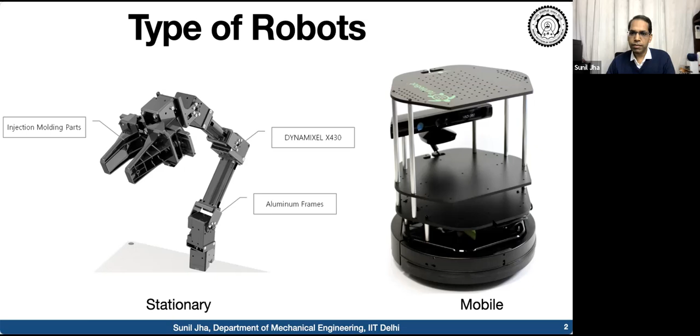As I was explaining in an earlier session, there are different types of robots that we all understand. There are grippers, basically articulated robots with multiple degrees of freedom - it's a kind of arm that you will be creating. There's also mobile platforms, like the base mostly seen in vacuum cleaning robots, and this is one of the turtle bots being used to learn ROS.

This is the one I was talking about, given in 2019 to create a legged robot - the Robocon challenge is around this robot. This is one robot design you can see which has similarity with legged robots, and there's a lot of popularity of legged robots around. So whenever it comes in Robocon, we can look forward to creating a good design for that. Otherwise, those who have interest can find a lot of resources.

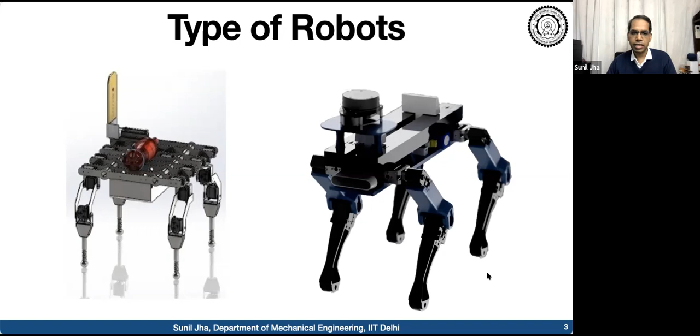When we were talking about the Robocon robot, in all the years of participation you find there is a base, and a lot of mechanisms added on top of that. So you will be coming out with designs of different mechanisms. The concept of those mechanisms can be thought through by brainstorming between team members on how they will attack the problem for that game. So we'll start with the base design, and slowly discuss some mechanisms useful for participation in Robocon.

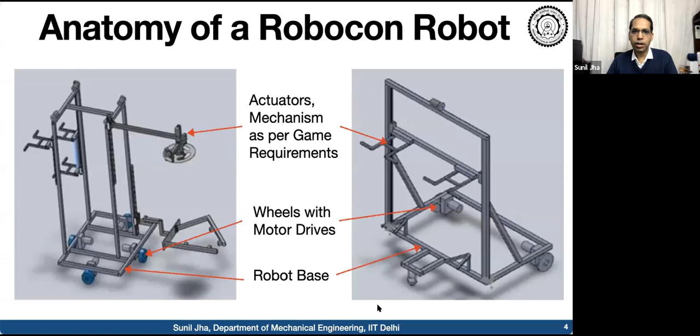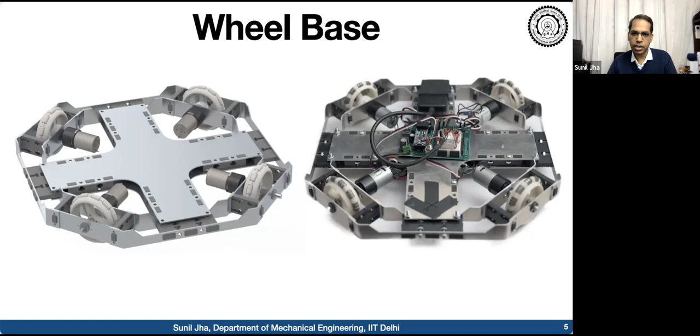Different wheel-based designs are there - we've captured some wheel-based designs here. This one has 4 wheels placed around the platform. The most important part is maneuverability in multiple directions - how quickly you will be able to move, take a turn, and reach a particular place in the game field. That's the basic idea.

This is another design of the wheelbase - you can have differential drives with one omni wheel caster, or use another type of caster, a rolling wheel. This is another design with 2 casters on front and back, and 2 differential drives. So there are various wheel bases being used. We'll start with one base design, but based on your interest, you can design and analyze other types of robotic platforms as well.

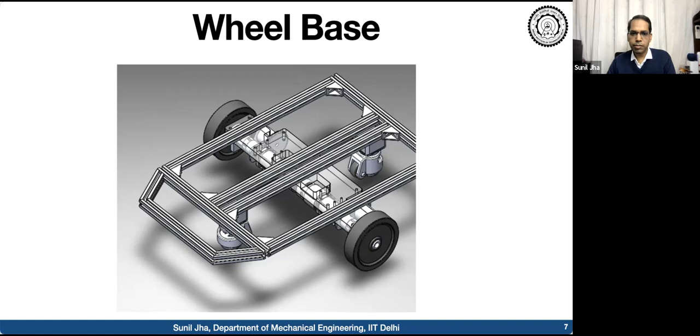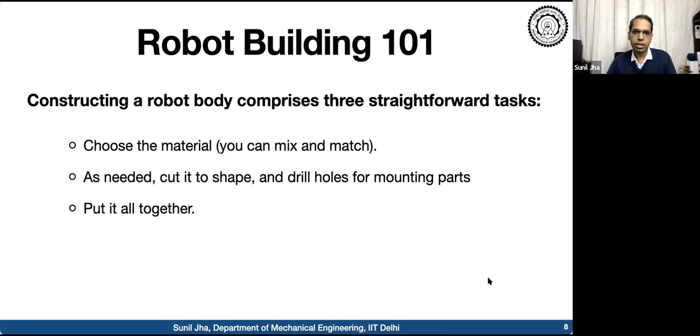As I was explaining, we need to understand 3 tasks while creating the robot. First, the material we need and should have to create the robot. Then, how we will assemble the different components of this material to create this basic platform. And then assembling the electronic circuit on top of that and making it run. That's what we'll be doing in this activity.

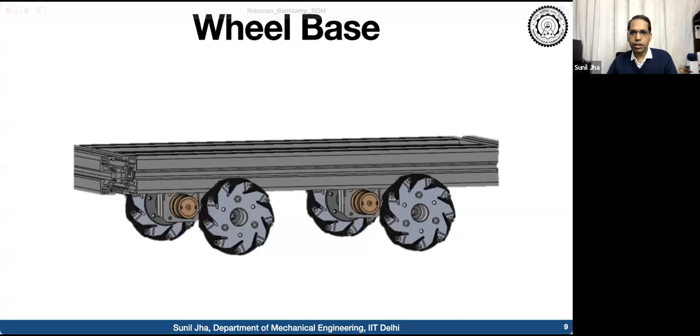This is the basic wheelbase we'll be using for the bootcamp activity - a 4-wheel mecanum design, roughly 500 by 500 millimeters, 0.5 meter by 0.5 meter, since that's a normal size for a Robocon robot. We'll see what materials are required for making this wheel platform, and that's what we'll take you through - a detailed bill of material for the bootcamp and a list of all items required. This list will be made available on the website too, on the FSM skills platform we mentioned.

Let's have a quick understanding and look at this bill of material. I appreciate the efforts done by the team at IIT Delhi to compile this material. We already have one set of material available with us, so we'll be creating the robot as we go along with you. Once you have this list of bill of material, you can have a quick look at it. We'll also provide all the links from where we bought this material - roughly within 6 to 7 days you'll get all the material once you place the order online.

Nothing to worry, even if you are working at your home, it doesn't require much effort. You can easily get this material available to you. There are very minor tools also required to make this robot platform, which I will share towards the end. So it doesn't mean that if you are not at the workshop or institute you can't do this, but this activity can be easily done at home. With minor tools you need to put in a little additional effort, but you can easily create this platform.

The first component you require is the high torque motor. This motor we have selected is 370 RPM with 147 Newton centimeter torque, and one motor costs 2,299 rupees, which is the cost available on the website. I recommend you go with the same components we will be recommending, so it will be easy to use the same design and follow it to create the same robot we are looking at.

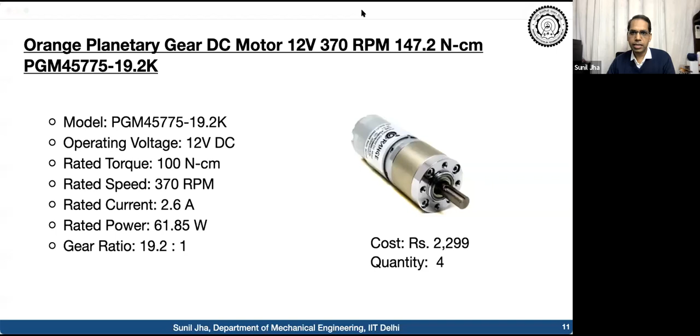We require 4 motors right now in this design, but when we go for a differential drive design, we may require only 2 motors and 2 caster wheels. In this design we will be using 4 motors. This is a bracket for mounting the motors. As we go along we will be doing this assembly ourselves. We'll get the motor separately and put it in the bracket, and this bracket has to be mounted onto the robot wheel base.

Okay, fine, Venkat. So you can take care of the people. I'm not allowing them, so depending on your list, you can just validate and then permit.

We have also mentioned the cost of these materials, so that you will get a fair idea about how much the whole bill of materials costs.

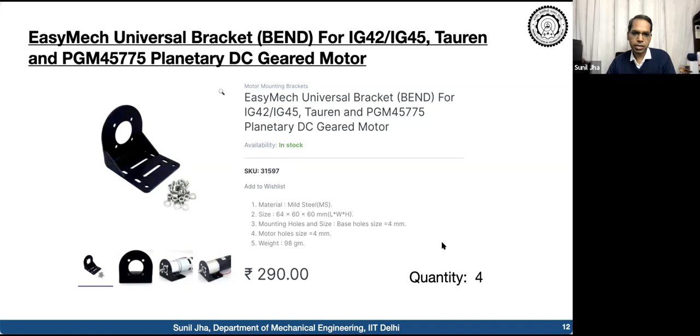This is the encoder we will be using, and the encoder is a very important part of the robot for odometry, because you have to measure how much the wheel rotates, and accordingly find out the displacement of the robot and in which direction it will be turning. So all odometry calculations can be done from this input coming from the wheel encoder. This encoder is required on all 4 motors and can be easily attached, as it has been designed to fix with the motor we have mentioned, so that most of the material we have selected is compatible with each other.

That's the important part. If you go with a different part number or different material, you may find difficulty fixing them together. So our recommendation is that we have already spent time selecting this material, so if you go by the same list, that will be better.

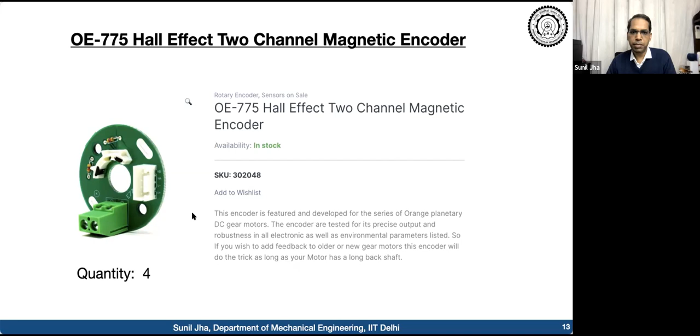Then this is a motor driver. The functionality of each hardware, how they will be put together, how the design will happen, will come later. Today's session is mainly to get you familiar with the kind of material required. After we share the list with you, you will start your procurement process, so that we will be utilizing the next 1 week's time.

At least by the time you have this material, we will take up some design activities as well. So this is a motor driver, and each will be able to drive 2 motors, so we'll require 2 numbers of these over here.

The motor driver is again a very important part of the robot, and it has to be a more rugged and robust driver, because many times I found that due to the large current drawn by the motors, maybe because of some failure in the robot, or the mechanical robot wheel getting stuck somewhere while it keeps drawing large current from the driver, this is the most critical component that gets damaged during robot performance. So that is how it has to be taken care of, and we always recommend to our teams that you keep at least 1 or 2 spares along with you, so you won't face a problem when performing some task with the robot.

This is an important component which takes a digital signal from the controller, whichever controller you use, and it drives the motors, while the algorithm part you will implement on the controller side. So this will be sourcing all the current required by the motors to run at the large torque and speed that you are looking for.

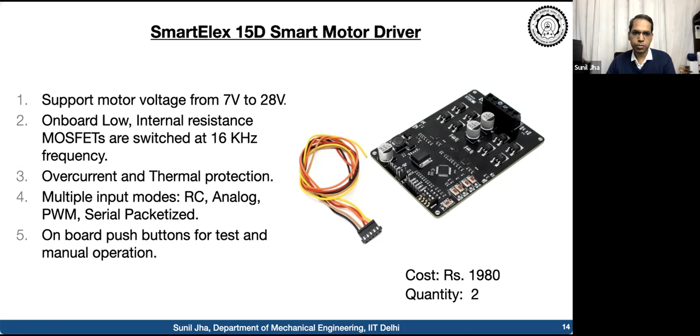Then we will be assembling the wheel part. So this is an element which is to be attached to the shaft, and then the shaft will be connecting with the wheel. So this mounting is for the wheel. You will be coupling the motor with the wheel part.

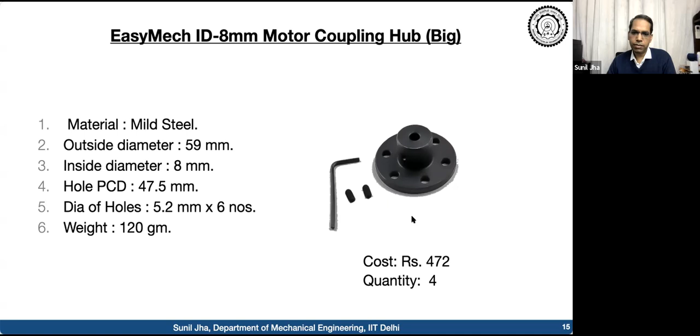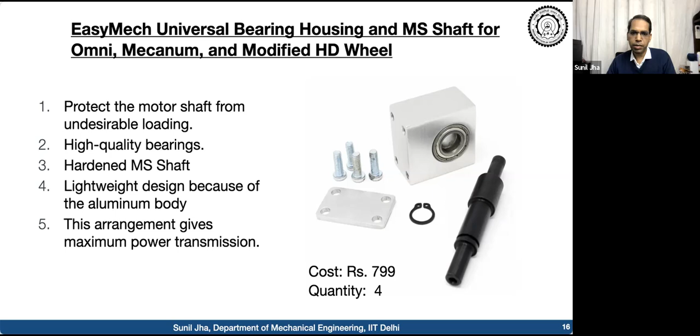This is a bearing house, so you will be supporting the wheel in the bearing, and then connecting with the motor with the coupling. So all these building blocks are required once you create one single axis drive. You will be having a motor, a mechanical shaft that you can see over here, then the bearing housing and the coupling, and then the wheel part you will be connecting. So this is the coupling part.

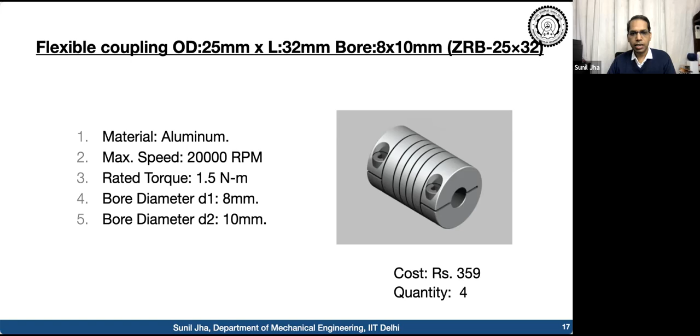The idea is that all load should not be coming onto the motor shaft. So that is how we need to support the wheel shaft properly, and couple it with this flexible coupling to the motor. So we require these 4 couplings for the robot.

Then these are the mecanum wheels that will be used. We will be requiring 2 left-hand side and 2 right-hand side wheels. So this is the right side wheels, and we require 2 left side wheels basically. So these are the 4 mecanum wheels required for making this robot.

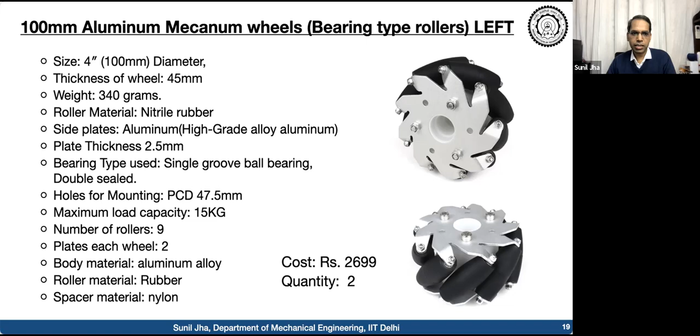Then comes the controller. So once you have a wheel, once you have a motor, you will also be having a driver. So at least this electromechanical hardware can be fitted to your base, and after that your driver should be communicating with the controller board.

So the brain of your robot, as we were discussing earlier, all sensor interfacing and all motion control interfacing will be happening with the controller board, because here we will be writing all the programs to actuate the different mechanisms of the robot based on the sensing that you will be getting.

So in this case, we have options to select which platform to use. I'll just show you 3 different platforms, 3 different controllers, depending on the kind of task you will be performing. As we go along for various themes in Robocon, you are mostly moving toward vision processing as well, so we need to put more advanced sensors onto the robot.

Many times people use LiDAR as a sensor, ultrasonic sensors will be there, and then optical sensors basically for line following. You'll also be having a camera that can be used in the robots. So the sensing world is now growing, and the controller capacity required to process that data is also required, which is a little higher. So we can give you exposure and understanding of different controllers and their capabilities.

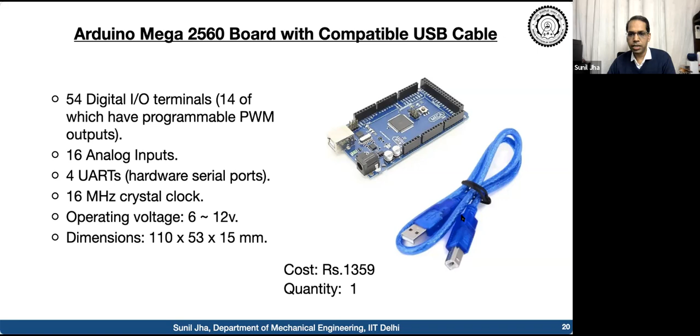But today we just need to identify which hardware you will be preferring. And then it has serial communication interfaces. So this is one board that is possible that you can use on your platform.

The other board that you can use here is the ESP WROOM 32 Wi-Fi. The good part is that this is again a good controller, a 32-bit controller, and you will be having a wireless capability into that.

So whenever we are going for manually operated robots, earlier people were connecting them with wires and designing a pendant to control the robot part. But these days we will be using PS4 handheld controllers through which we can communicate wirelessly. So if you are requiring a wireless communication interface, this controller has Wi-Fi as well as Bluetooth onto that. So this controller we can connect with Bluetooth, and PS4 can communicate to it, and you will be able to control the robot wirelessly in the field.

So any manually controlled robot can be wirelessly controlled. In that case, you need to have some Bluetooth communication available on your controller. The previous board that I shared with you was not having Bluetooth, so we need to add an additional shield onto that to add Bluetooth capability in the Arduino. But this controller comes inbuilt with that Bluetooth capability. So this is another possibility.

It has a very good flash memory also, so you can have large programs running into this. So this is another option of the controller.

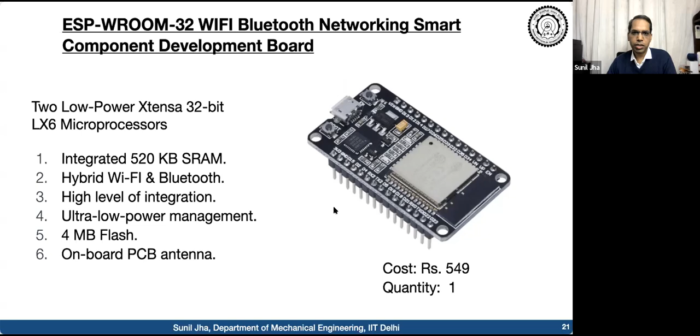The third processor we will be discussing is the Raspberry Pi. Those who are familiar with it, the current version is Raspberry Pi 4, which comes in 2 GB, 4 GB, and 8 GB RAM capabilities.

This is the board which actually runs an OS. The previous boards were not running operating systems, so certain applications and functionality can only be done with an operating system. This is a kind of mini onboard computer for you. You can run Ubuntu into it, you can run Raspbian into it, so multiple operating systems can be made to run.

Once you run Ubuntu onto it, you will be able to run an operating system like ROS for controlling a robot, and the complete functionality can be done in ROS on this. The earlier two boards were not supporting ROS implementation because it requires an operating system to work on. So this is the high-end processor that you can use with your robot platform.

The good part with ROS is that you can create multiple nodes and distributed processing. Sometimes we may be processing the vision part and then the LiDAR sensor, or maybe additional sensor IOs, that will be more difficult to manage with the previously discussed boards.

But this kind of board with an operating system like Ubuntu running on it, and with the drivers available from ROS, you will be able to process all those signals simultaneously. We can also design the whole control system where multiple boards are working together, so that's a way distributed computing can also be implemented once we go with ROS.

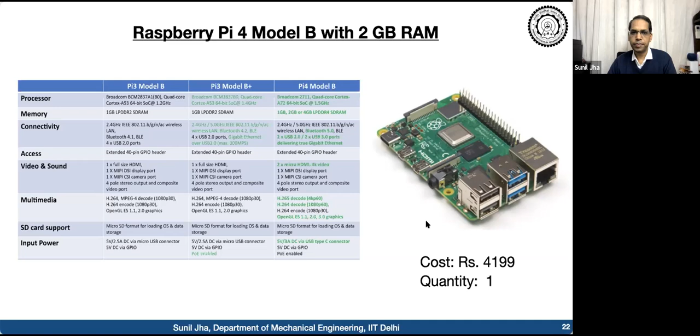This is just a memory card for this Raspberry Pi only. The previous two controllers, Arduino and ESP32, may not require this card because they have onboard memory that is used for that purpose. They have limited memory capabilities, but that is good for embedded computing, and you will be writing the program directly onto their flash memory. You need not put any additional expansion card like this. So this is only required if you are using a Jetson or a Raspberry Pi.

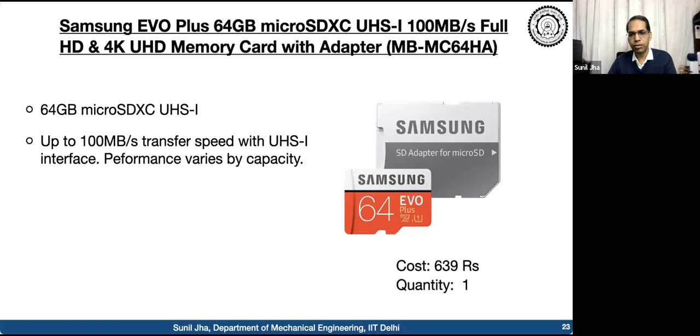Then the most important part is the battery, because your robot is supposed to perform multiple tasks. We need to assess the total power consumption required for the robot, and most importantly, it's supposed to run the whole task for a 3 minute game. We also look forward to doing some trials, so the total AH required for this battery is very important. This is a 12,000 milliAh battery, that is a 12 AH battery.

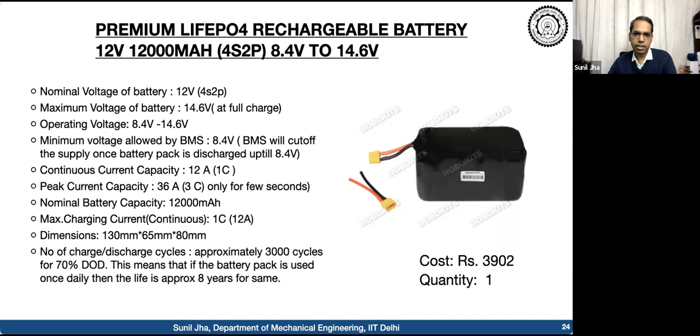We will be using this to power all the motors, the controller part, and certainly the sensors. So everything requires power, and we have to estimate the total power consumption, with the highest power being consumed by the motors only. That is how we need to see the large current being drawn by the motors, so we need to find out the size of the battery. Sizing of the battery is a very important part, and this is the one we have selected for the robot we will be creating.

Then you need to charge this battery because it is a rechargeable battery. So you can have a battery charger that will help you in charging the battery multiple times as you go along and test your platform.

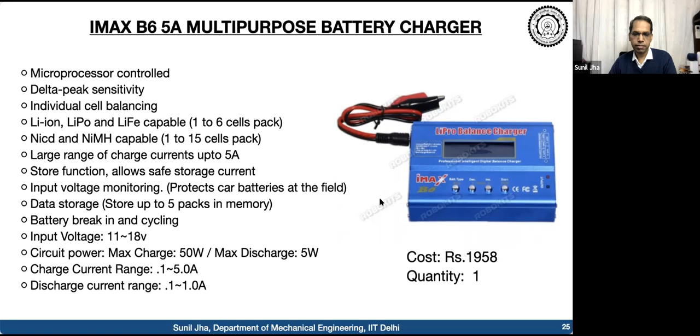For manual control, before this wireless controller, people were using wired controllers, but these wires can't be taken so long in the field, and they sometimes entangle with stuff on the game field. So this is the handy part that you can use to wirelessly move your platform manually.

So there are two modes: one is the manual control part and another is the autonomous part. It depends on which tasks we would like to perform manually and which functionality we would like to implement autonomously. This year's theme also gives you the freedom to choose the autonomous and manual functionalities.

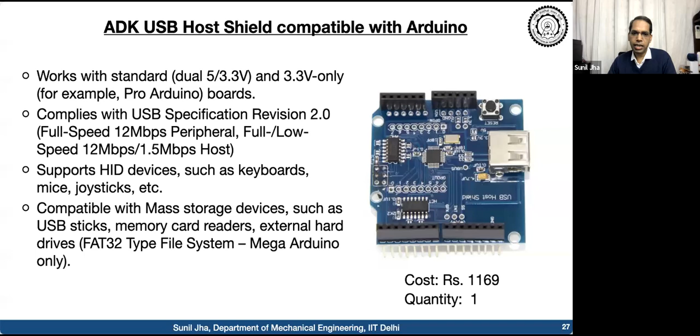This is the shield that you require if you are planning to use Arduino with this PS4 wireless controller, because Arduino as such doesn't come with Bluetooth capabilities. With this shield, you can add USB functionality, and then you use this USB Bluetooth adapter so that once connected, Arduino will also be able to communicate with the PS4.

If you are using a Raspberry Pi, it already comes with Bluetooth capabilities. If you are using ESP32, it also has Bluetooth capability, so you can directly pair this PS4 wireless controller with that. But if you are using an Arduino, then you need to put this shield and this Bluetooth adapter, so that you will be able to communicate via Bluetooth.

You require good quality wires, and the current rating should be good enough, because this is another problem area. We rarely distinguish between the signal wires and the power wires. So it's important to understand where we are going to connect what cross-section wire.

This 10 AWG silicone wire has been chosen so that you will be powering up all the power circuits, basically the motor driver to motor. So where exactly we will use power wires versus signal wires for the digital signal, all that we need to decide, and we will be implementing this activity as well.

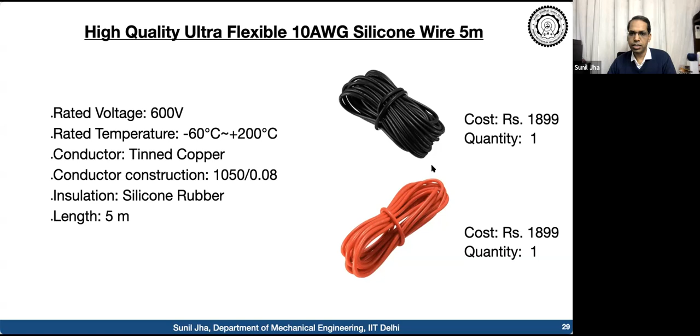These are the 5 meter bundles that we have selected, because it may or may not be required completely, but it may also be available in 1 meter choices, which you can decide to use. Then these are the connectors for the power.

The power connector should be very tightly coupled so there will not be any loose connections, because if it remains loose, sparking will happen, and by the time you go to the field to perform the actual task, the connector can burn out. So these XT60 connectors are very good for making power connections.

We'll prefer the connection with these silicone insulated wires, the 10 AWG wire, to be soldered with these connectors and with proper sleeve connections. All these steps will show you how it can be done, so that the connection will be more rugged and tight, and these minor pitfalls will not occur when you are operating your robot.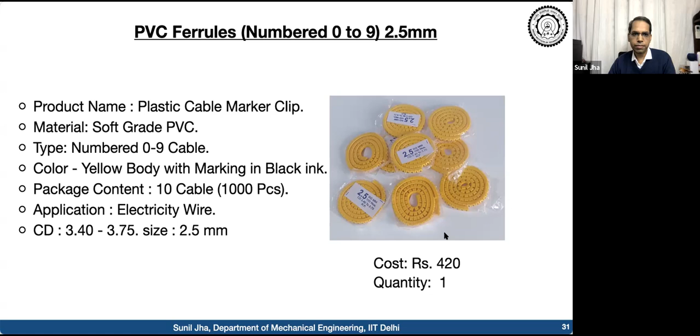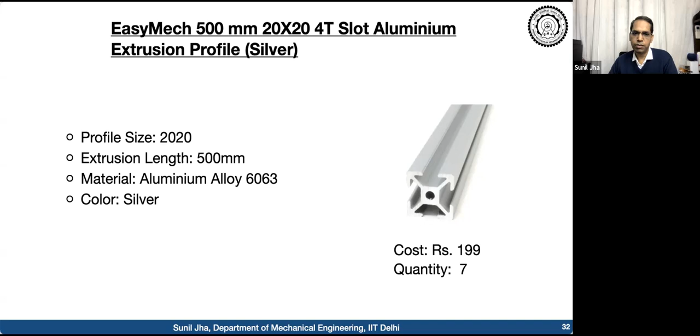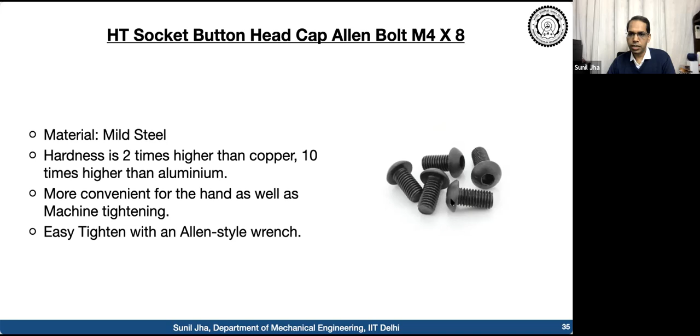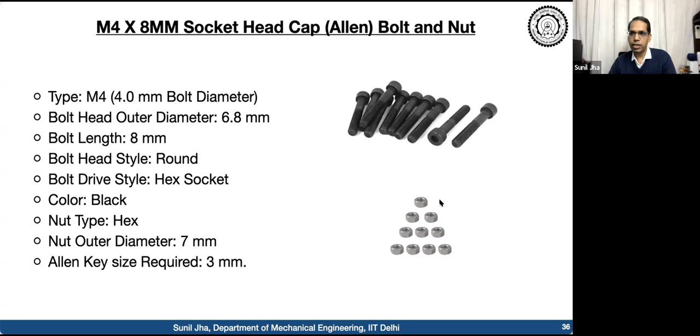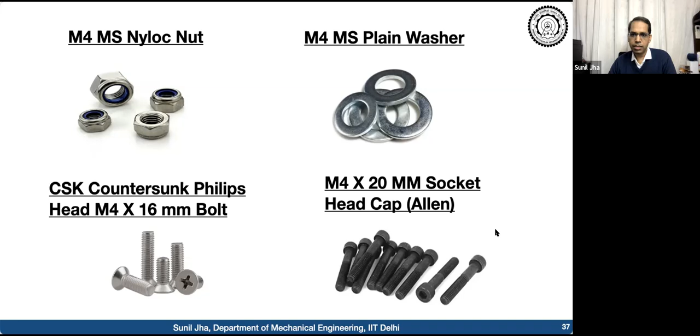These are the bolts you will be using, the Allen bolts with the M4 button head. If you see that M4 nuts are there, M4 bolts are also required. Then there are different types of nuts and bolts required, so we just give you some recommendation to buy this. These are the additional fixation materials required - Nyloc nuts, washers, countersunk heads, and socket head cap - these are the Allen bolts required for fabrication.

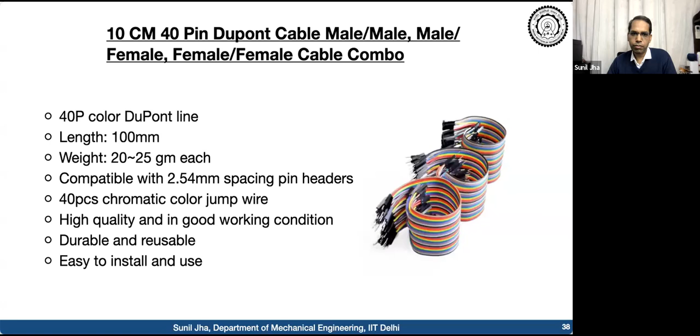Many times you need to transport your robot to different locations. Those coming for national participation will bring it to Delhi; if going for an international event, they have to take it elsewhere, but this time it's in India only. Still, you have to transport your robot from one place to another, so it has to be rugged enough that your electrical connections don't get disturbed as you keep moving the robot. Depending on the kind of connection, we discuss which type of connector to use when making these connections.

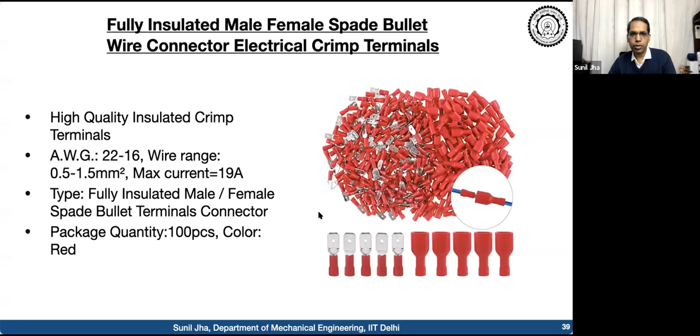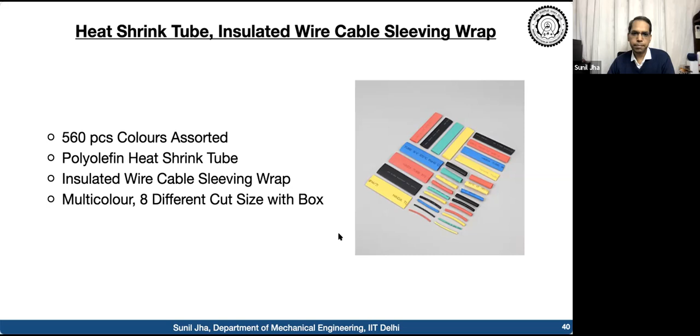Then we also require these ferrules for connecting to the screw terminal. Wherever you have screw terminals, as I was explaining, all industrial automation connections are done with the help of these thimbles or wire ferrules, where you place the wire inside, then crimp it - you can crimp it with a plier - and then put this into the screw terminal and tighten the screw. We need to see the electrical connections where soldering needs to be done and where screw connections are to be done, because sometimes you need to replace the component and sometimes you need to permanently solder the wire.

So all these things we learn as we go along while we are creating the electrical connections. I think that is all the components that I have just listed. So this is the complete list of components that we need to procure. Once we have this material available, when we share with you what step needs to be done and which component to be used, you will be able to correlate with the same material you will be having when developing this robot.

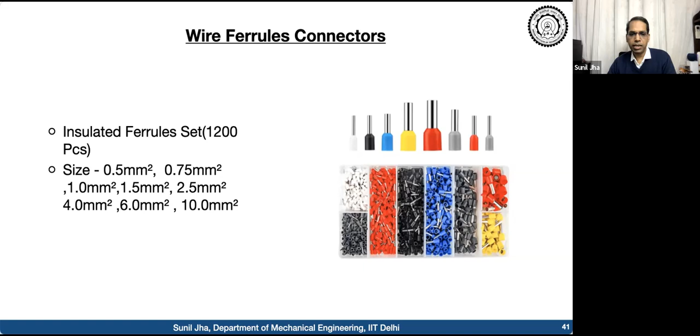After this, I want to take you through some of the tools, though I explained earlier in the previous session. Basic tools are required, and most of the tools are available at home also. But if you don't have them, you can at least get some basic tools. For example, the drill may or may not be available at home, but the screwdriver, hammer, plier are already available. So drill and drill bit you need to purchase.

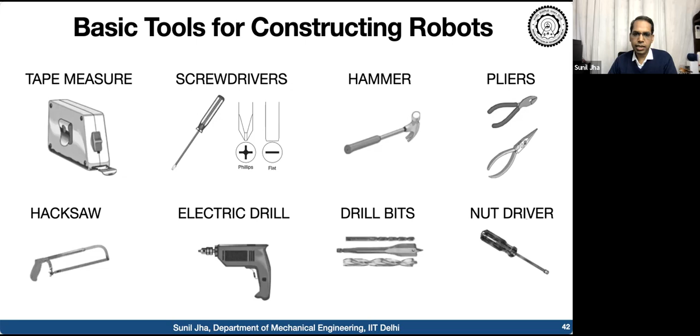This drill and drill bit may cost around 1,000 rupees or so, so that is the additional thing. For all cutting operations, if you have access to a power saw, you can use it, because we will be using a power saw in our workshop. Otherwise, the hacksaw can also be used. You have already operated a hacksaw in your engineering first year, so you know how to cut things. Mainly, if you get all cut sections of equal size, it will be nice; otherwise, we will cut it and then you will join them. So that is how the basic tools are required.

This is an important part when we will be cutting the aluminum at an angle, and sometimes you have to hold it. This miter saw helps you cut the aluminum section at a certain angle. If it is 90 degrees, you can cut it with a simple saw also, but this miter saw is mainly useful when we have to cut at a different angle. If you are working at home, you may not have access to this, so in that case you will use the saw itself.

All of you have basically invested a lot in your engineering education and will still be investing in it. This activity we are trying to do is certainly more exciting, and spending a little more on this will not go to waste. You learn a lot of skills, and the more practical things you do, the more you will enjoy engineering. That is what I felt too, because in our school days we always loved doing science projects and building things. Once we learned something from textbooks, we always liked to experiment with it. Robotics is such a field that once you learn something, you would like to experiment with it immediately. That's a very important part.

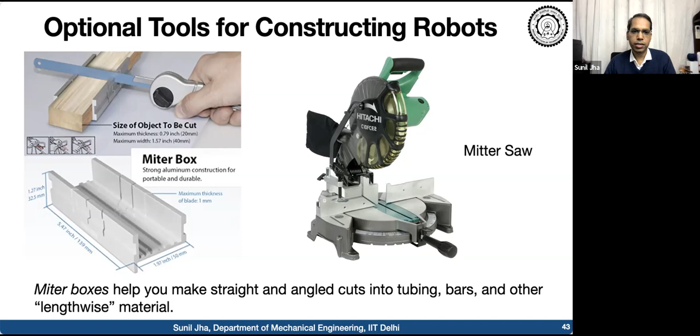So these are the power tools. I'm not sure while being at home you may have access to that, but these are always good to have. A vice is always good. Even if you're at home, you can have a vice, because while cutting or fixing, you can hold it somewhere and then cut, because otherwise holding an aluminum profile and cutting it may be a little bit difficult. So a vice can be managed also.

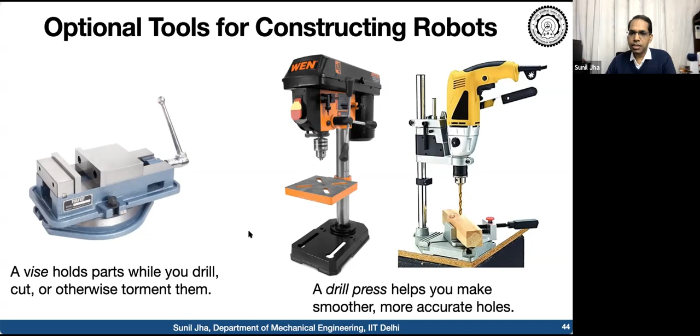Certainly as an engineer, you can have some corner at your home where you can do this activity. So communicate with your parents that you're going to do this activity for the next few months, and that you'll be looking for a small workshop kind of place in your home. I always love to have that kind of small space where you can work physically and create this kind of platform. That is my suggestion to all of you.

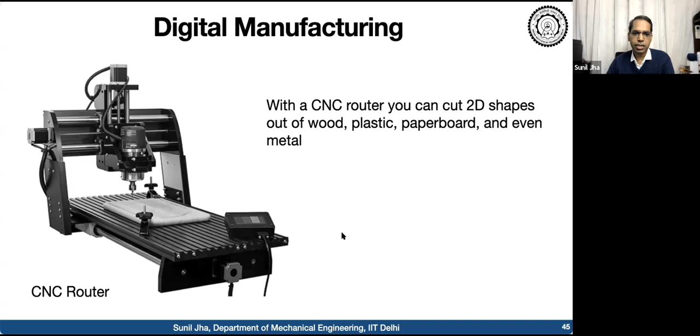These are the tools we will use later on. We will spend time understanding digital manufacturing later, but we need not own this equipment. We will just utilize the services available over different websites. We only need to understand what data to generate so we can transfer that data to these manufacturers, and they can give us the final finished component. So laser, CNC router, additive manufacturing, and all these services are available.

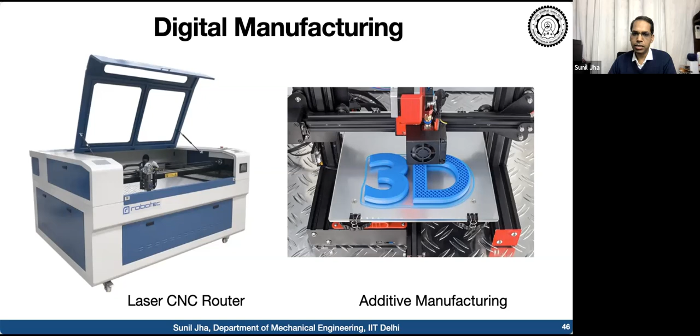So we need not invest in this costly equipment. You can only pay for whatever component you are looking for. So for this boot camp, at least the basic materials and tools we discuss are what we expect: a drilling machine for metal, and this is very important. The drill bits for metal are completely different from the drill bits for wood or other soft materials, even for acrylic.

So especially we will get drill bits for metal, because we will be making holes in the aluminum wherever required. A screwdriver set will be available, a spanner set can be managed, pliers too. Fabrication on aluminum, this power tool may or may not be available. Cutting can be done with a hacksaw also, but it takes a lot of effort and time. If you can manage to have this power tool, that is always good. Otherwise, the electronic tools are also required.

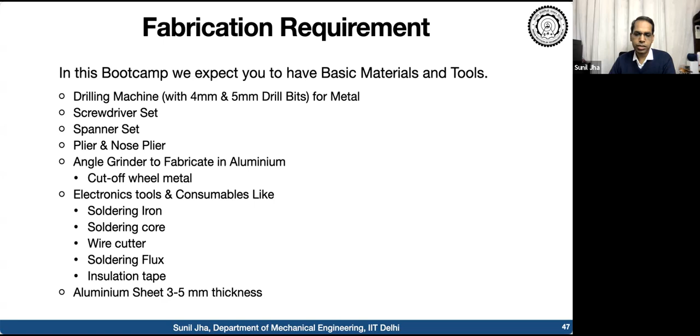Soldering is required. If you have not done soldering earlier, let's start doing that part, because you need to do soldering for certain components. What accessories are required for performing the soldering - that is again an art. I will show you how you can do good soldering, and then there's the aluminum sheet or acrylic sheets.

This is all from my side, what resources you will need for this activity, and this is the preparation for this exercise that we are going to do till mid of February. Now I'm leaving this platform for your discussions, and if you have any query, please let me know.

I hope you get a sense of the kind of material you require for making this robot. That is the idea of having this session, so we understand what I'm supposed to gather to start this activity. Is this clear? You can respond to that. At least you'll get some idea about what is required for making the robot.

So I am looking forward for the response. The silence doesn't indicate anything. Yes, sir, we got pretty much everything. Okay, good, good. Thank you.

Thank you, that's nice. So certainly these kind of live sessions we will conduct more frequently as we go along. Apart from 11 to 13, we'll have a few more sessions like this whenever we do this activity, mainly for preparation. I will be preparing a calendar of activities that we need to do before we reach the final day, so we have all the resources, what software tools to be used, what software to be learned. And some basic design preparation we can start as well.